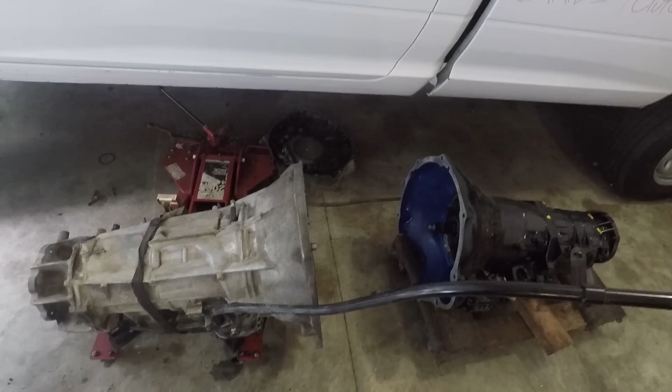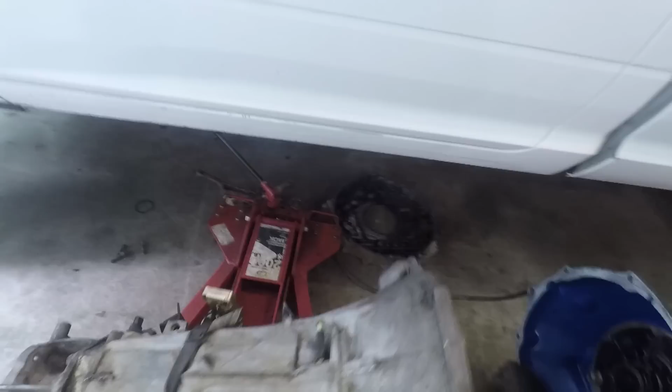So the 68RFE here on the left, 48RE on the right. As you can see, the 48RE has one electrical plug. That is, I believe, 8 pins, and that's it. The 68RFE, we have electrical plug here, electrical plug here, electrical plug here, and this big bad boy right here for all your transmission controls.

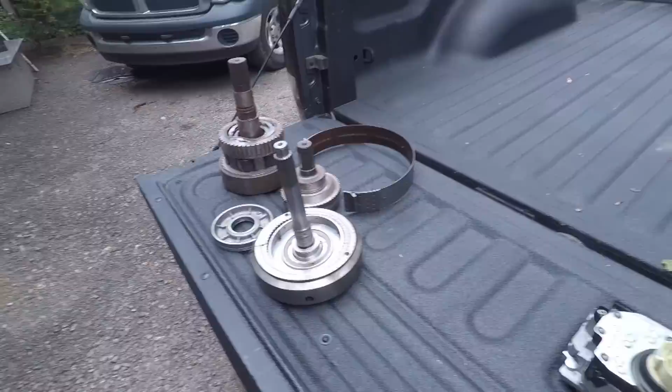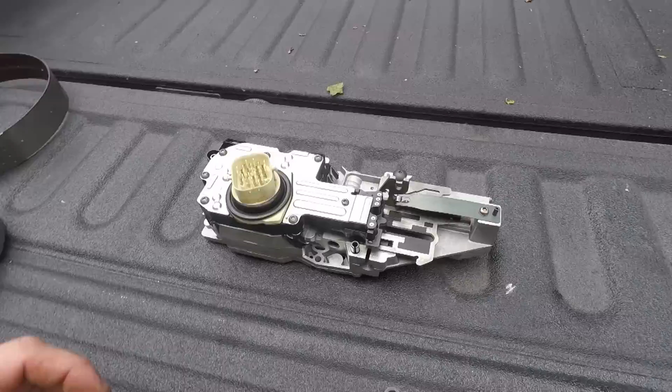So, as we come over to the truck, as you can see, we have some parts for other parts of the discussion. Here is part of a valve body for a 68RFE that I cut down. I was trying to do a little research, I guess you would say. So, speaking of how modern it is, as you can see, there's like 20-some pins on this one electrical connector that is on the 68RFE. So there's a lot of information going on.

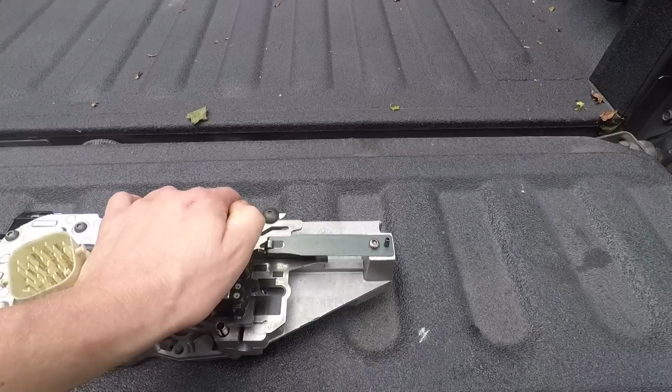Also, this slide right here, this is how the truck knows where the transmission is, whether it's in park, drive, reverse, neutral. So, say this is the park position. You put it in drive. I guess that would be manual first there, but say drive. That's how the truck knows it. And how this works is, this is actually grounded. So, say, push this back. Say you had it in this notch here. So these pins, there's 5 pins here.

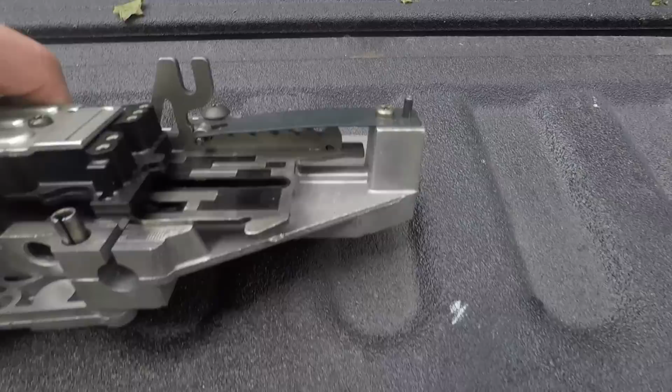And when you shift the transmission to say this point, the truck will see nothing, ground, ground, ground, nothing. And that tells the truck, say, drive. So you move the next slide over, you have ground, ground, ground, ground, nothing. So that might tell the truck neutral. And then you got this open spot here, ground, ground, nothing, nothing. That might tell the truck it's in park. A little more complex than I think it needs to be, but that's what it is.

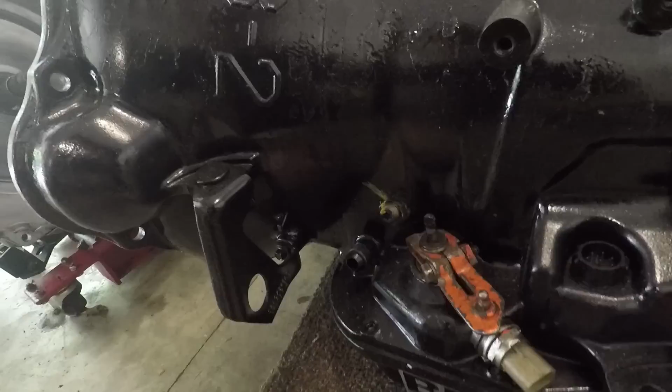On the 48RE trucks, there is a pin setup for the neutral safety type switch. So the depth in which that pin is in indicates to the truck by, I believe, like a resistance value, what gear the truck's in. The 47RE trucks, they had a simpler neutral safety switch that would operate your reverse lights and tell the truck when it was in neutral. My transmission, I have one of those plugs. As you can see, it's just a 3-prong plug. So that's how the 47REs, that's their electronic indication for neutral, reverse, so on and so forth.

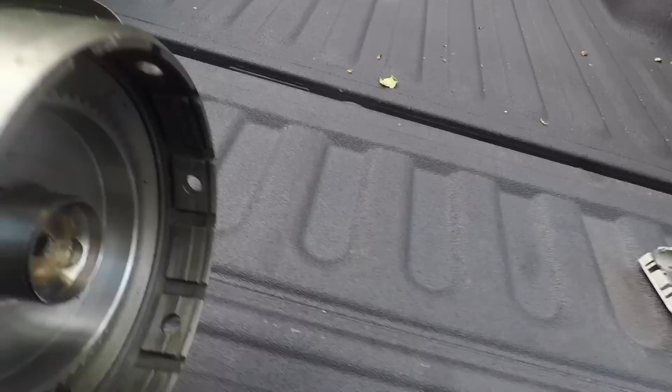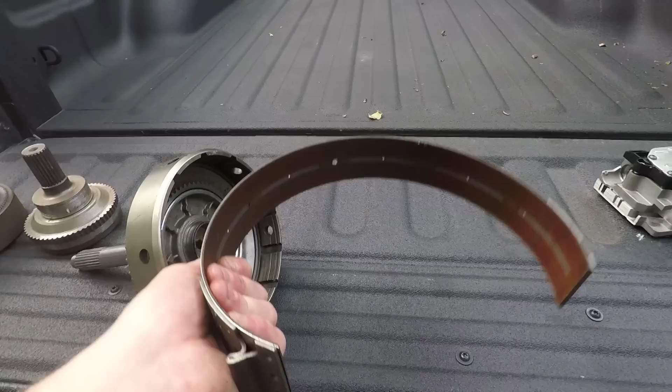Alright guys, so done with this. As I was saying, there's direct clutches or drive clutches. This piston goes in here and fluid will apply, and this pushes on a spring which pushes on clutch packs and applies that. This is that second gear band that I talked about. There's another drum, the direct drum, and when it hits the shift point, the valve body commands a little servo. It gets fluid from the valve body and it pushes on an arm that grabs a hold of the direct drum, and the direct drum also has clutches in it which will apply when this band releases to give you third gear. And then overdrive has a set of overdrive brake and overdrive clutches.

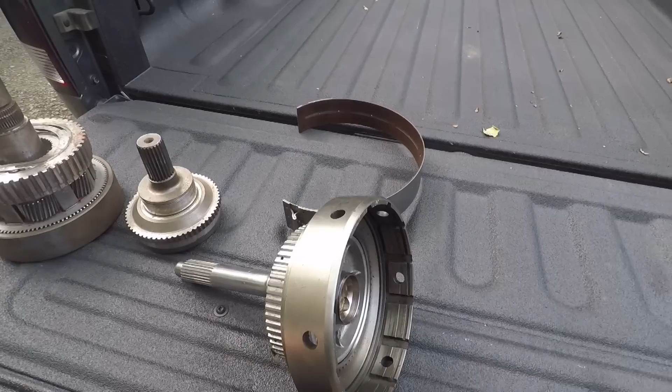Honestly, I don't understand 100% how it works, but there's some more clutches there. That's another thing about the 68RFE. Apparently the overdrive clutches in the back of this transmission are not very robust. When I put the 467 turbo on my truck, without even changing the tuning, if you were in one of the overdrive gears and you punched it, the truck would just shake because it was slipping the clutches. And I was told with just that, when I broke it at the track, all the clutches in that trans were shot. So that's another thing. Stock form, neither one's going to hold all the power in the world that you want. Alright, so that was the differences.

Now why swap? Why do you want to take your modern transmission out that Mopar thinks is so great and put in one that's over a decade old? There's 3 reasons: simplicity, strength, and speed. So simplicity, as you can see, it's a lot simpler electronically, but that is also the same hard parts wise. They're a lot easier to rebuild. You could find a local guy who does diesel transmissions and you can have them build your 48RE, or if it needs a rebuild, if you get into very high horsepowers, the clutches need changed out often. So the simplicity of the 48 makes it easier to have rebuilt, whereas a 68RFE is very complex. Everything has to be very precise. Really limits your options at who can build you a trans.

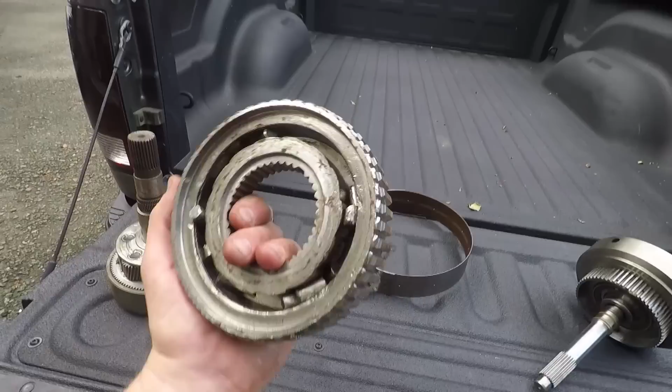Talking about strength also, the 68RFE has this thing called a low reverse sprag. As you can see, this is not how this is supposed to look. I broke this at the track. This is actually a billet sprag that is an upgrade that you buy for this transmission. I had that transmission fully built to the 9s, and I still did that to it.

I had a local shop build my 68RFE, who's well known in the area for transmissions. They will remain nameless. So I talked to them and they said, yeah, we can do what you want. We recommend our stage 4. So my next immediate question was, stage 4, what's it cost to go to a stage 5? They said, we don't have a stage 5. I said, all right, while you're building it, if you find something else that can be upgraded in it, do it. So I had, at the time, their first and only stage 5 68RFE.

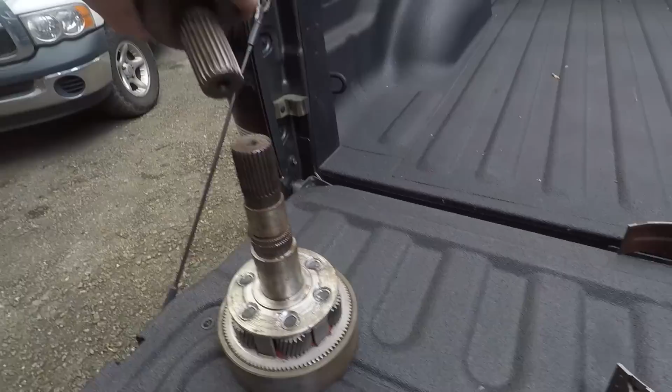Needless to say, went to the track, 5 or 6 passes later, this billet sprag, well, you see what happened to it. No bueno at all. This is your output shaft. And here's the factory output shaft for a 48RE. As you can see, it's significantly smaller. But that being said, if you're building the trans, I recommend you upgrade this to the 29 spline that's in ours. That's a billet piece. It's the same size as this shaft, which as you can see is noticeably more robust.

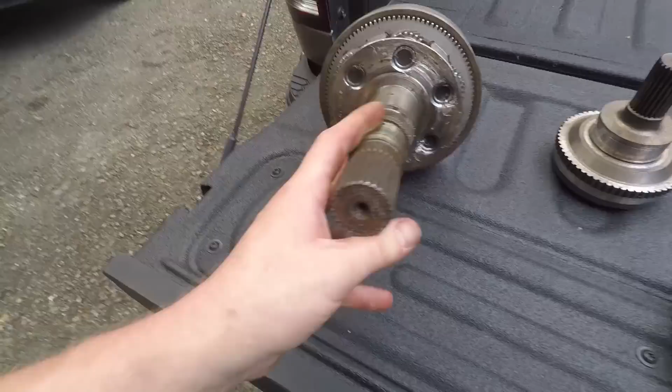Now, nobody makes an aftermarket output shaft that I'm aware of for a 68RFE, and the reason is, as you can see, this planetary and this shaft, it's all one piece. There's no real way to take it apart, no snap rings or anything like that that we found. So, and I don't know if you're going to be able to see this on video, those splines have a slight twist to them. Hopefully you can.

I had commented on a RevMax Instagram post probably a couple years ago now, and RevMax responded saying, that's not an issue, that doesn't happen. Well, it did to me. Hopefully you guys can see it in the video, but yeah, you can twist those splines. It's possible. This is not a billet piece from my understanding. And once again, look at the difference in size.

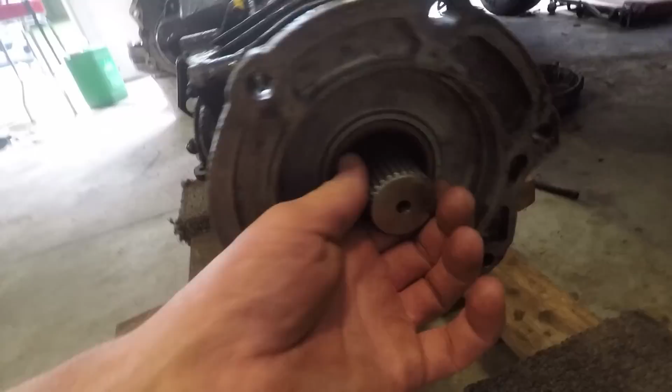But like I said, on a 48RE, when you're building it, you can put the larger diameter output shaft in it, which I thoroughly recommend, because if you're going to have it apart and swap it into your truck, why not put the baddest shit you can in it? So there's a lot of options for the 48RE, and honestly, when we were at the UCC, the majority of the trucks there, Ford, Dodge, or Chevy, had 48REs in them, because they've gotten to a point where they can make them hold the power.

The 68RFE, like I said, RevMax did a good job, but it's still kind of unproven, or it's proven that it can't hold the power. So they're working on that, but it will never be as strong as a 48RE as far as I'm concerned. So you have strength. The last one is speed. The 48RE is going to be quicker shifting. Why is that? Because the 68RFE has to apply a clutch pack, disengage it, apply another clutch pack. Just going to be a little slower shifting.

The 48RE has a set of drive clutches that's always spinning in all forward gears. So then the second gear shift hits. The little PCM that goes with it says shift. Now a band applies, so now you're in second gear. Third gear, it releases that band and applies an additional set of clutches to the direct drum. So it's just a simpler setup, and it's just on, off. Really, really simple. So that's the 3 reasons why you would consider doing this swap.

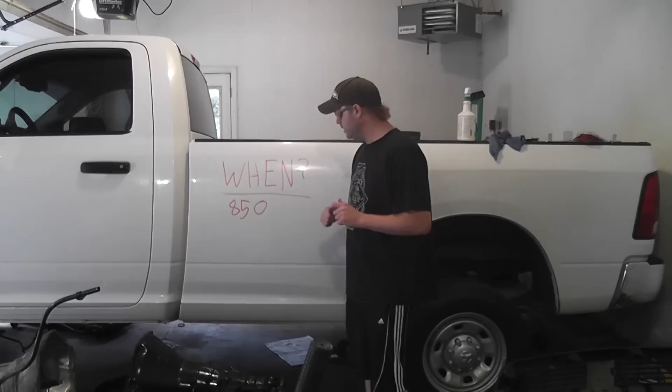Now, I was listening to a podcast, and RevMax themselves even said, if this is a truck that you're going to be drag racing constantly, and you're at that 850 horsepower mark, it's just not going to hold up. So they even admitted a 48 RE is better for that kind of application.

Now I would never recommend boost launching a 68 RFE, no matter how it's built. Like I said, I spent a lot of money to have the trans done in the gray truck, took it to the track, and blew it apart. So I would not recommend that at all.

But if you're a guy making 800 horsepower, say, and you tow, daily drive the truck, I would certainly not have a problem having a 68 RFE in it. So, if you go over that 850 mark, I would certainly recommend really contemplating this swap.

Above that 850 mark, you should probably look at a 48 RE, because if you're making that kind of power, more than likely you're going to want to play with it. You're going to see a guy at a red light in a Duramax and hear it whistle or something. You're going to want to race it. So you're going to launch the truck.

You're probably going to drag race it, pull it, something. You're making that power for a reason. You're going to want to use it. So after 850, that's when I think you should do this swap. That being said,

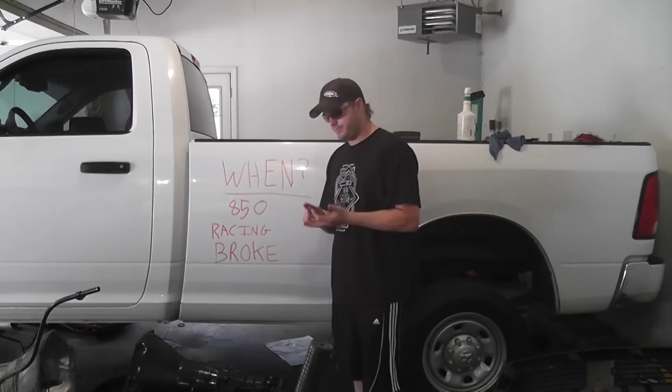If you're going to do a 48 RE swap, it's probably 10 grand, maybe a little more. It all depends on your options. But remember, you've got to take into consideration that's handling all your control. We're going to go over all that's involved with a 48 RE swap later. But that's controlling the transmission, a fully built transmission, and all the provisions to put it in your truck.

So it's probably $1,500 to $2,000 more expensive than doing a full build on your 68 RFE. If you have an expensive truck like one of these and you're making this kind of power, that shouldn't really be a big deal for you. You should know going into it that these are the costs associated with playing with this kind of power and this kind of truck. So those are kind of the 3 times when I think you should look at doing a 48 RE swap. So now on to our next topic.

We've gone over the differences in the 2 transmissions. We've gone over why you might want to swap. We've gone over when you should think about swapping. Now, let's go over the pros and cons of each.

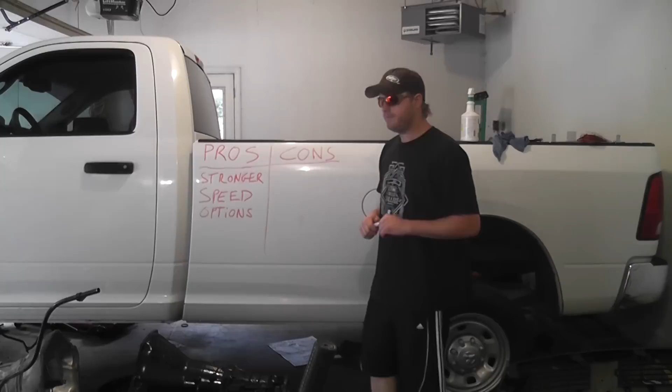Alright, so this is the pros and cons of doing a 48RE swap. The first few pros we've already talked about, that being strength, speed, options. Just to touch on this stuff again, the 48RE in a built form is stronger than the 68RFE. That has been proven. Many of the trucks we saw at the UCC were running a 48RE for that reason. Now, RevMax does have it figured out a little bit better, and they showcase that, but still, 48RE is stronger. It will shift faster, quicker, and harder.

And also you have options. Options, that means you can build a 48RE pretty much how you want. What shafts you want. If you want to do the swap, but say you don't have all the money in the world, you can put a stock intermediate shaft in it, and that'll be your weak link. Because from what I understand, a stock intermediate shaft, when they snap in these transmissions, it's usually a clean break, doesn't destroy everything else. You just have to have it torn down.

But you have options. You can get a local guy to build it, like myself. I don't rebuild the transmission, but I have a guy in Rising Sun. He rebuilds my transmission for me. That's who I use. Usually when we have a failure, because I have snapped 2 input shafts in my 48RE, but we'll go into that later, we have a conversation. It's not just cut and dry, this is what it is. We have a conversation about it.

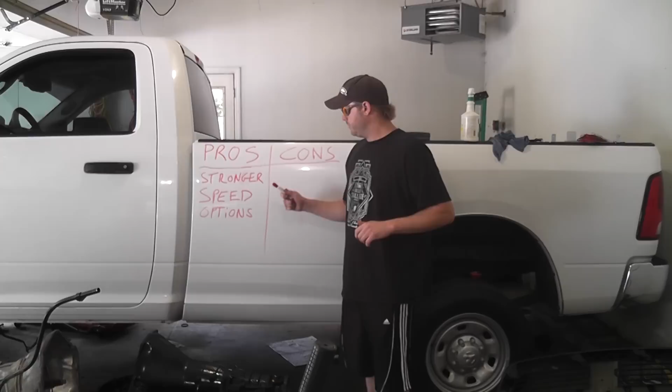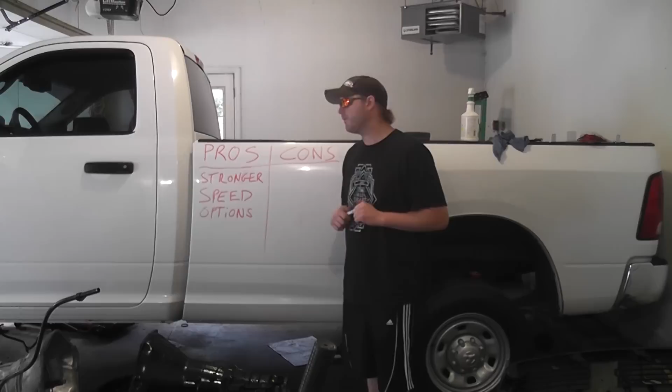So, you have options. With the 68RFE, like I said, there's only about 3 manufacturers out there that I would really trust to do it. I've been through having a local shop do it, and I wouldn't do it again that way. Let me put it that way. I'd probably be looking really hard at a Suncoast or a RevMax. And after what I saw at UCC, RevMax is probably who I would go with.

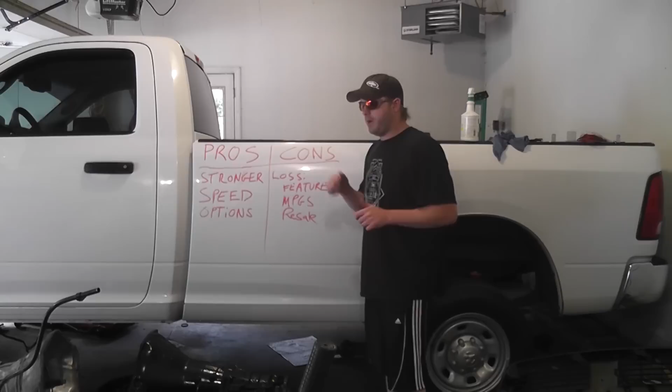Some cons of the 48RE swap is loss. But there's a couple subsections with that. Loss of what? Loss of features. With my gray truck, I had a box that would be going into this truck that allowed my reverse lights to work and also told the truck when it was in reverse. But other than that, the truck either thought it was in reverse or neutral. So my 4 low would work, but things you need to be in park for did not, such as, stupid as it is, the memory option on the seats no longer functioned because the truck never saw park.

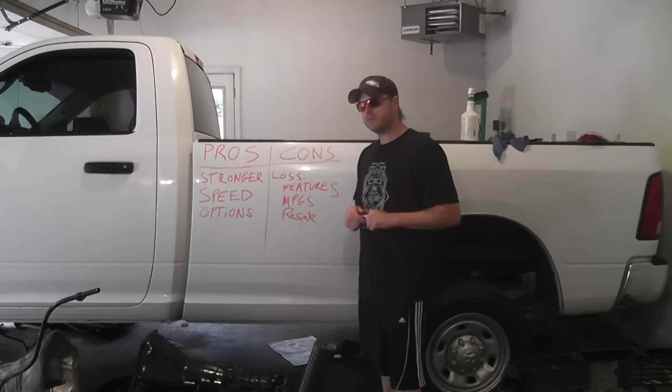Also, if you don't get a box like I have from Fire Punk, you won't be able to use your 4-low. You'll have to figure out how to wire your reverse lights. And I also lost cruise control. So a lot of the cool features that you probably bought the truck originally for, you're not going to be able to use them anymore. Also, you've lost an overdrive gear and an underdrive gear. So inevitably, your miles per gallon is going to go down. I don't care what anybody says, it's going to be lower.

Resale. You're going to lose resale on this truck. Unless you can find that guy who is looking for a newer truck with the older transmission, which I'm sure they're out there, and that might even be a selling point to those people. But they are certainly in the minority.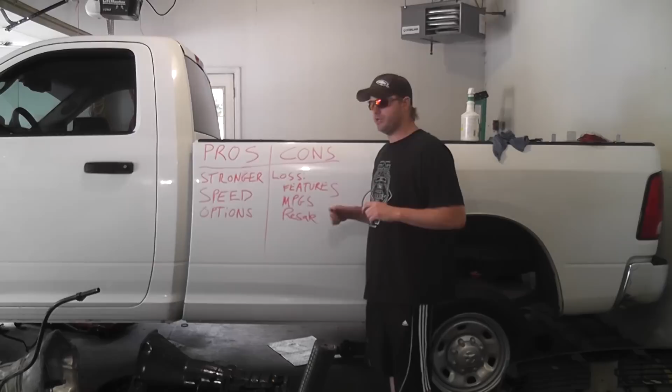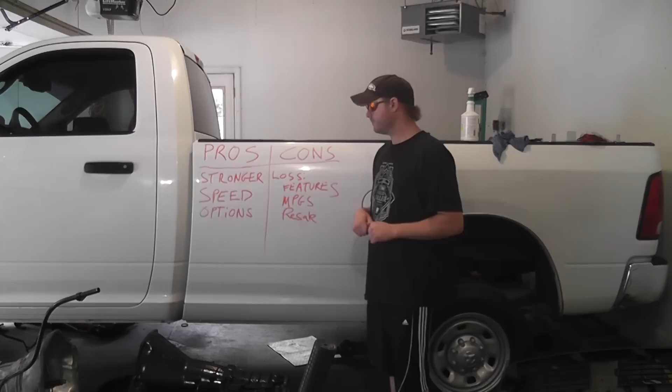If you took this truck to a local Dodge dealer and you wanted to trade it in on a brand new truck, you're tired of this body style, whatever, the dealer more than likely is going to laugh at you. They're not going to want anything to do with it because they have no idea what's going on and they know it's going to be a hard flip for them. So unless you can find that guy who really wants a 48RE swap truck and knows what a 48 swap truck is, you're probably going to lose money on that deal.

All right, I know that's probably spelled wrong, but I don't really give a fuck.

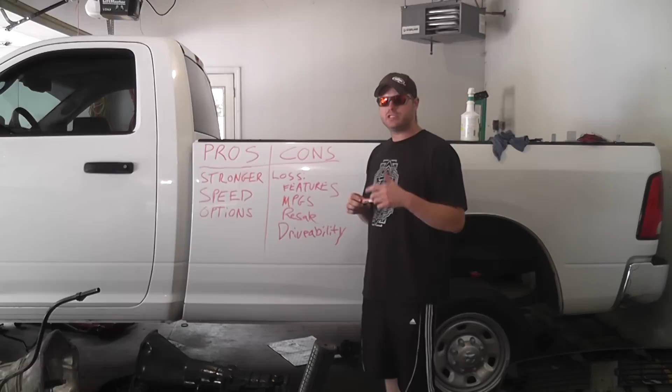But drivability. When I say drivability, it's a little bit different than you're probably first thinking. You're thinking how you just can't drive it on the street or it's a pain in the ass driving on the street. Not the case. The 48RE was behind trucks from 94 to 07, so it's perfectly streetable and perfectly drivable. By drivability, I mean that you've lost a couple gears. It's not going to be as smooth, and particularly in our situation, we're talking built transmission area here.

Your shifts on your 48RE are going to be noticeable. It's going to move you. It's very, very firm, as I would say. The 68RFE, it's just a nice, smooth shifting transmission. Has like a progressive lockup where lockup just doesn't hit like another shift. It kind of eases into it a lot of times.

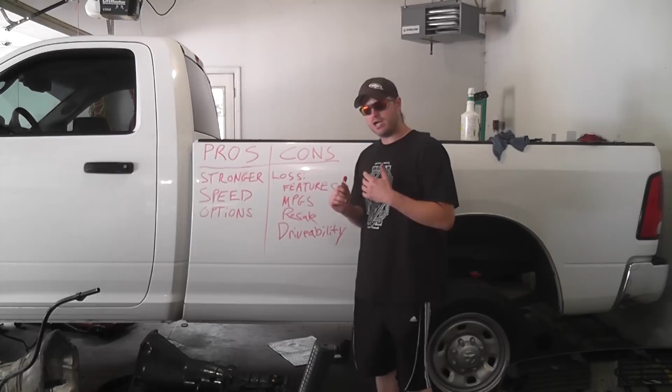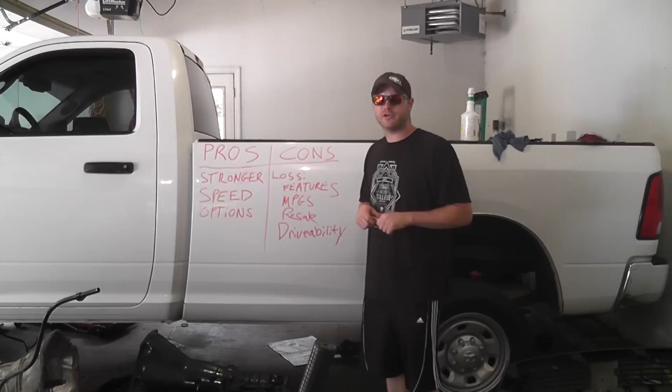Also, your shifts, everything from Chrysler was made to be driver friendly. Make it smooth and nice, and people spending $60,000 on their truck don't feel like they're driving a tractor. So you kind of lose that bit of drivability of having a nice, smooth, luxurious, if you will, truck to drive. You're back to driving kind of like a modern tractor.

The loss of features might not be as big of an issue anymore. Just to backtrack a little bit, I'm sorry, but I forgot the features thing might actually not be an issue anymore. Firepunk out in Ohio, who I got all my transmission controller stuff from, I believe they've developed a new product they're calling the Porcupine. I don't know why Porcupine, but they like it. Apparently this is not an issue.

And the features issue also is definitely a greater issue on the 13 and up trucks. The 10s to 12s, not as big a deal. The 13 and ups, apparently it was a major issue. Some tuners wouldn't even tune them anymore. But that might not be a problem. Look up Firepunk, give them a call if you're looking at this. That Porcupine they got apparently makes it seem like the truck came with a 48 from the factory.

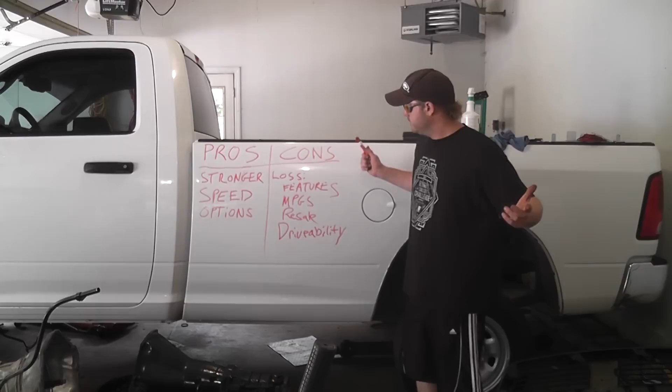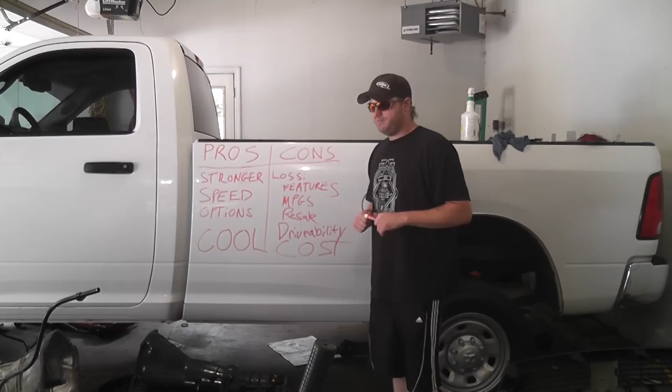So there's only one more pro and con I can think of, and the last pro is it's cool. You got something different. If you got people that don't know much about cars and stuff, and you tell them, hey, I put this decade-old transmission in my brand new truck. To me, that's cool. You got something not every other truck on the road's got. You're driving down the road, you see another truck your body style, you say, you know what, this guy doesn't have this. To me, that makes it cool.

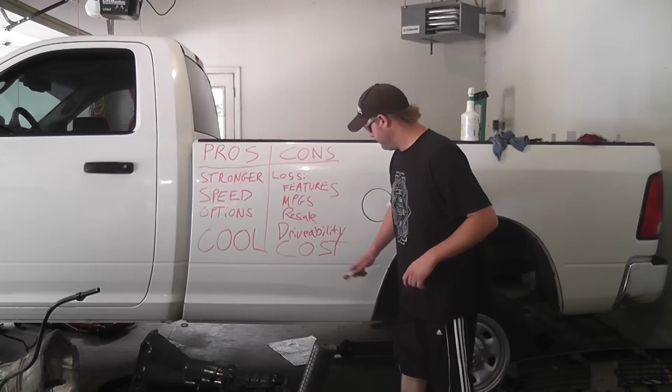But that being said, the price of cool ain't cheap. It's expensive. Like I said, 10 or 11 grand to do this swap. If you're at this level though, that's something you should be fully aware of, because if you're looking to do a 48RE swap, more than likely your 68RFE is not going to hang in there either. So that's when you need to make that decision of what do I want to do? Which transmission do I want to build?

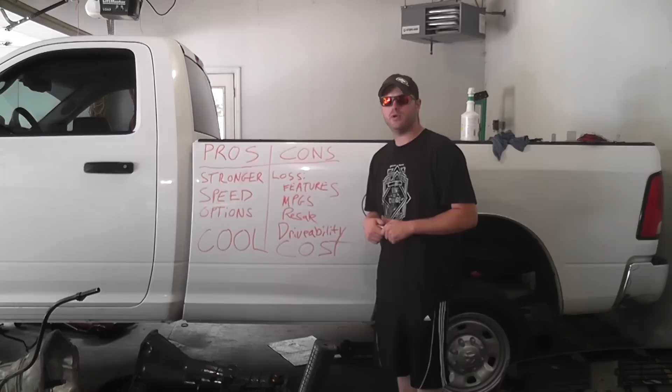Which leads us on to our final part of the conversation. This is the main thing. Now you have all the information, you can make an informed decision. You need to ask yourself, do I want comfort or do I want competition? If you're at that 800, 850 mark and you're saying you want the best of both worlds, you need to ask yourself an additional question. Is it going to stay 800 or 850? Or am I going to push for 900 or even 1,000 horsepower?

Because if you're like most people, eventually that 800 will become normal. You'll get bored with it. You're going to want more. That's when you get into the competition side. That's when you're going to want to do this swap. Now, if you're going to make 800 horse and you're happy with it, and you know it's going to stay there, you're going to drive it daily, you're going to tow with it, all that, you're in the comfort category.

So you're going to want to build a 68RFE to the nines. Every upgraded part you can get in it. But if you want that little bit more and you know you're going to get that itch eventually, you're the perfect candidate for competition, for the swap. So that's kind of what it boils down to, just basics.

So I hope you guys really have become informed on this swap. I know I probably rambled a little, it's a little all over the place. Probably a lot of ums in there, but now you know. Now you can make an informed decision about what to do.